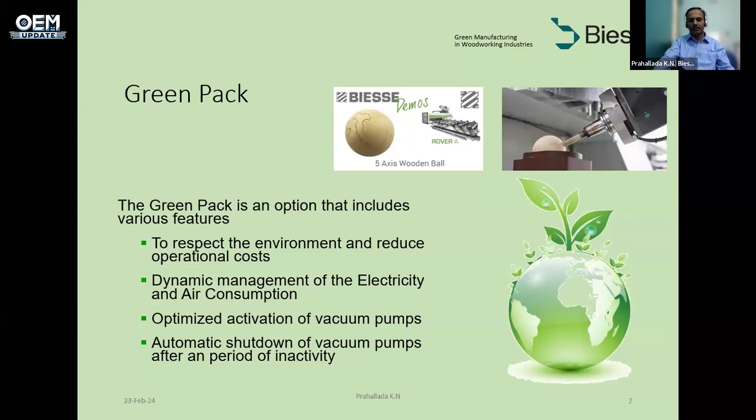So we need a plan for optimization of activation of vacuum pumps. We have vacuum zoning, and for that we have automatic shutdown of vacuum pumps after a period of inactivity. All these things are incorporated in the package, and it's a good sign that many customers are going with this package.

Also, in manufacturing aspects where we can target certain things, we had a project of coming up with green PVC vacuum modules - the suction cups we use on our pod and rail machines. We have some configurations using 16 pods, some using 24, and some using 32 of these parts on the machine.

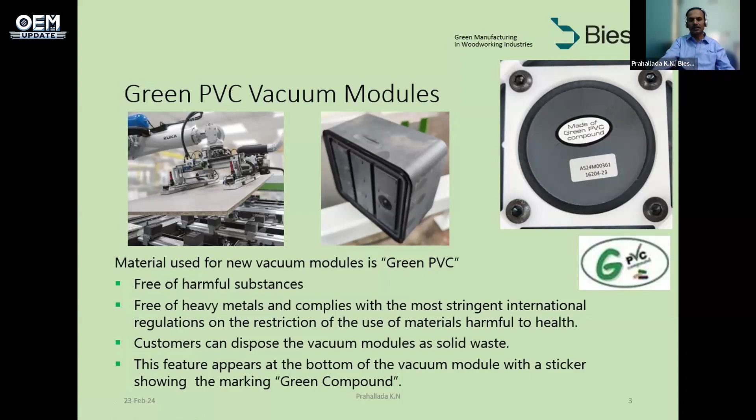So we started using material called green PVC, which is free of harmful substances, free of heavy metals, and complies with most stringent international regulations. The good thing is customers can dispose of the vacuum modules as solid waste. This is clearly mentioned on the bottom of the vacuum pod - you can see the green PVC compound marking, showing customers can dispose of this without any special treatment needed, unlike the previous modules made with phenolic.

Also on the technical aspect, we have started with another option - the torque C-axis, an interpolating C-axis on the electro spindle. On the left hand side, this was the traditional solution with a motor reduction gearbox and gears, which had many parts, an external motor, and a bigger flange to accommodate it.

One thing is on the machine dynamics part, because this comes on the Z-axis, so it has a definite bearing on the acceleration and machine dynamics. We worked on this and spent a substantial amount of our turnover on R&D projects like this - not only to enhance technical capabilities, but also on the sustainability aspect of reducing the footprint of developing technologies, especially the carbon footprint.

So now we have a compact torque C-axis, which is not only a technically superior solution than the existing one, but also very compact, with improved machine dynamics. It's actually 3 times faster and 6 times more accurate, and this serves better because it's something like the DDM motor you have today in advanced washing machines from Samsung, LG, Bosch, and similar brands.

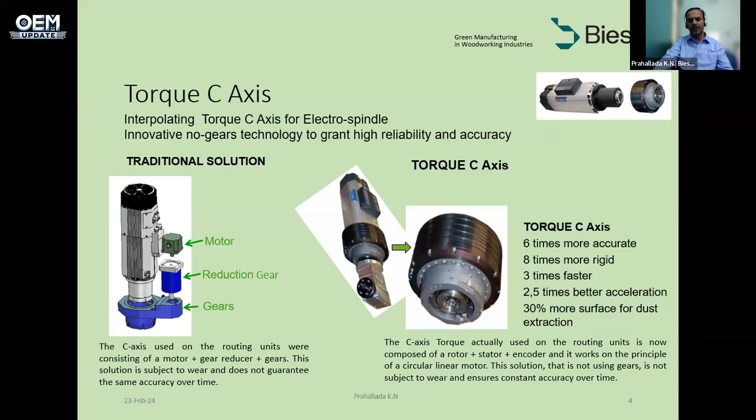That is the takeaway which we need to consider going by the green manufacturing technologies. So when it comes to this, like little drops of water make a mighty ocean, even we go to that minutest details, where earlier we used to have plastic inserts and sleeves to identify cables, and we use a lot of cables in the machines and systems we manufacture.

So we have incorporated an automatic cable length measurement, cable stripping, and another important aspect on the cable itself. Now we have a direct printing mechanism with a thermo inkjet printer that prints directly on the cable. It is not only on the electrical cables, but also printed on the tubes we use in our pneumatic modules. With this, we have eliminated most of the plastic sleeves that were there.

You can see on the left hand side here, the old system where we had the identifiers, which were small plastic modules. We have totally eliminated this across all the machine formats we are doing. With this, we have substantially reduced the part count as well as the plastic that finally goes as waste, which we have avoided by adopting this practice.

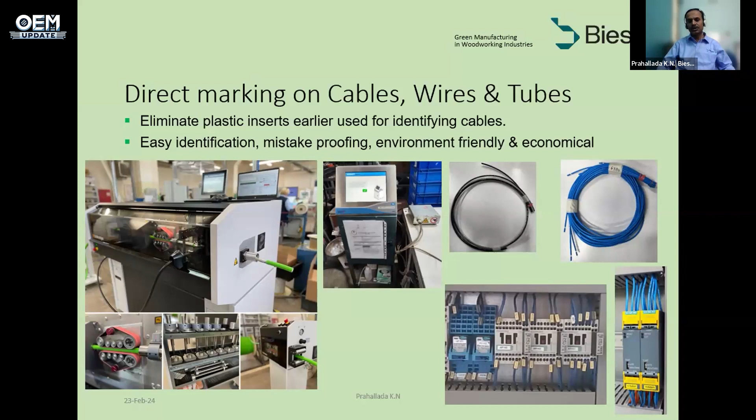So the next one is a very important innovation that happened recently on our edge banding machines. This is actually a hydrogen force system, an innovative solution for perfect zero glue line edge bonding. And it is something we can boast of today: with 1 liter of water, 1.5 kilometers of edge band panels is possible today.

And this actually ends up with almost a 70% reduction in energy consumption. That's a whopping amount when compared with the previous technologies we had, and also with the technologies our competitors have. And also it guarantees unmatched quality on finished products, and great edge bonding strength, which is very much essential in high-end furniture.

And of course, energy consumption is reduced and maintenance costs are minimized. This system is more environment friendly because it doesn't use any glue, but a minimum amount of glue with a special edge banding tape. It will be there on the tape itself.

So this system actually uses the hydrolysis process to generate hydrogen, which is used as a sustainable energy. In fact, hydrogen is ignited at that particular point where the energy is required to do the banding process. And it is definitely lower in maintenance cost compared with other technologies, particularly the laser technology. This is actually a breakthrough innovation done recently by Biesse Group.

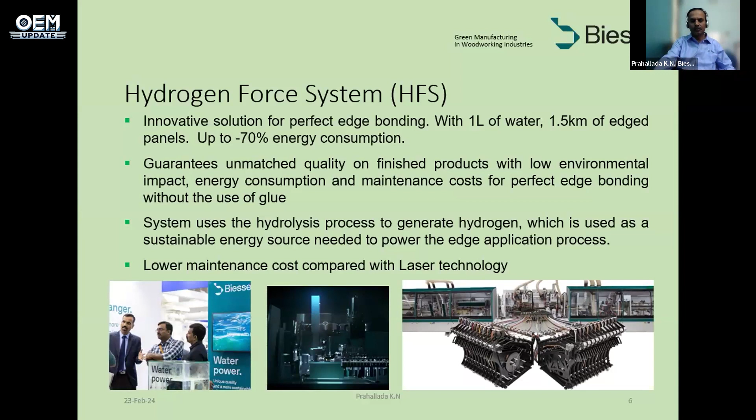Also when it comes to assembly manufacturing systems, here in our Bangalore plant as well as in our plants in Italy, we have lean manufacturing systems incorporated, where machines having more footprint are assembled and tested at customer site, while only the basement unit comprising the cutting line is tested in the factory. Modular unit assemblies aid in installation and testing on site within a day.

So we have this breakup of modules, and also a thorough process where it can be integrated at the customer site within 24 hours. And assembly on rails, which is real-time monitored as with the takt time requirements that are there. And for all the machining lines, it is established. You can see clearly for our edge banding line here, as well as for the CNC line.

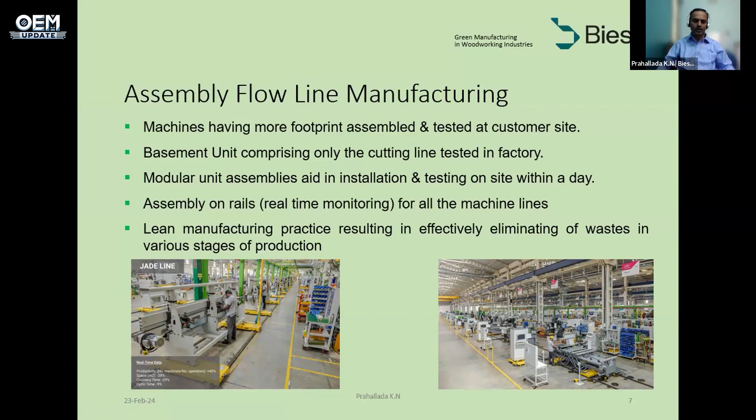And lean manufacturing practices result in effective elimination of waste, all the 7 ways, 8 ways that we have in the lean system, through various stages of production.

And of course, the key differentiator in the business today is the software. Here, there is substantial improvement in optimization and utilization targeted towards the material our customers use, especially with the nesting technologies and the OptiPlanning software we have for our sizing systems, and proprietary software for optimizing cutting patterns, tool path, and real-time simulation for complex machining requirements.

So it is actually happening. Simulation can be done in real time, and all of these are part of our 3D CAD/CAM system, which is proprietary software developed by Biesse.

An efficient and intelligent material handling system complementing diverse production needs of customers, from basic automation to very high-end automation. Even for batch-one processing all the way to mass production, we have solutions, and we have mastered having systems across the world, across all formats of industries.

An award-winning software was developed on an IoT-based platform called Sophia, for services optimization, predictive maintenance, spare parts management, and analytics. In collaboration with Accenture we developed this, and it was awarded during Ligna.

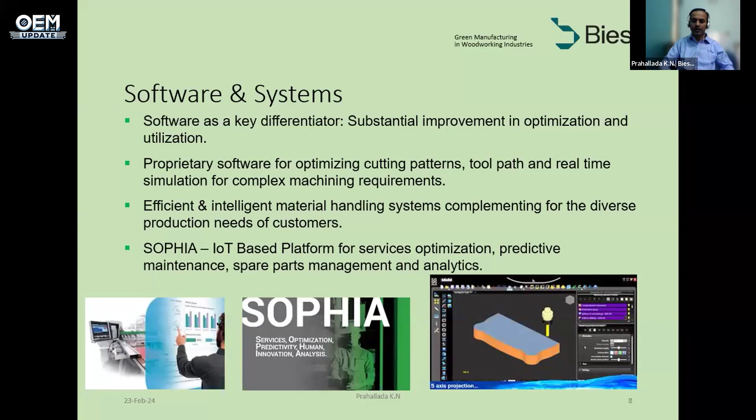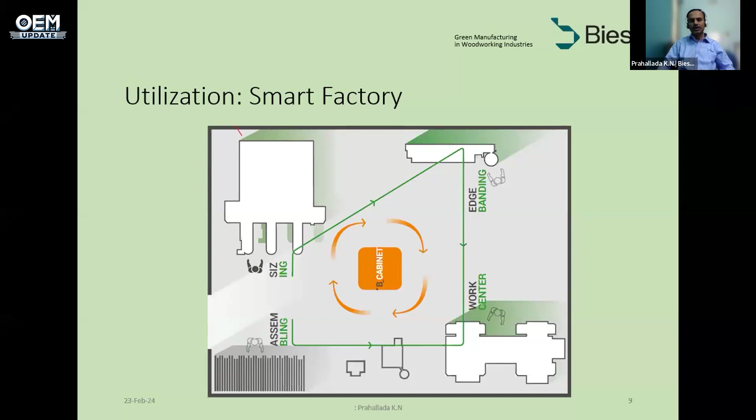We have this integration even for small-scale manufacturing requirements, with a master software that controls operational sequences through various machine centers like sizing, edge banding, and machining work centers. The master software drives optimization and planning, the CADs, and the process flow. This is a design-cum-machining software integrated as a package mainly targeted towards process automation.

This layout shows that within a space of around 1,200 square meters, we can have a modern digital factory for companies requiring high return on investment. It's for customized production requiring a minimum number of operators, and of course scalability is there too, with the concept of plug and play so customers can integrate when and where required for their production and productivity needs.

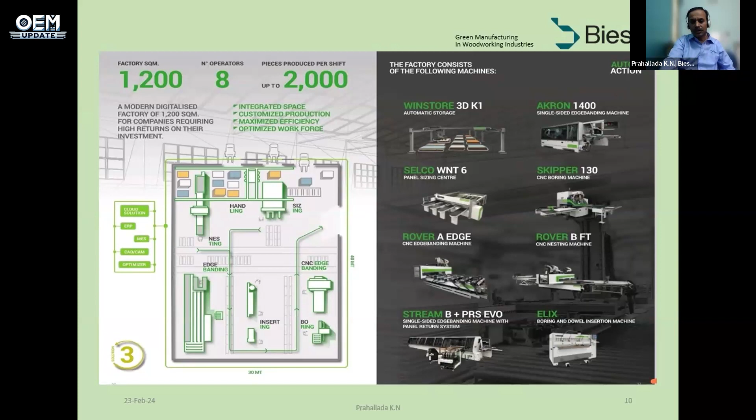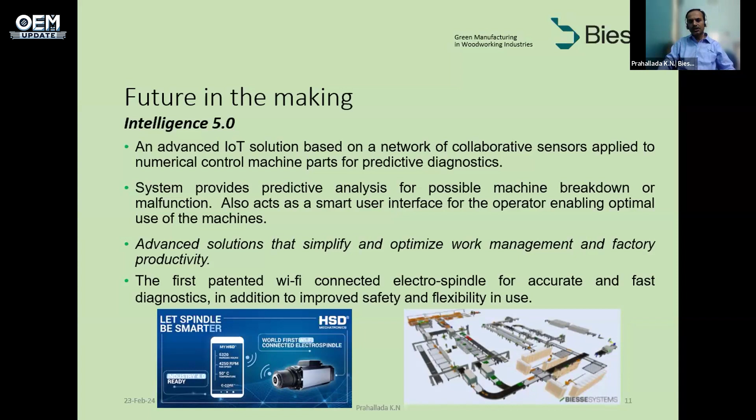One of the group companies, HSD, has come up with a Wi-Fi connected electrospindle for accurate diagnostics, in addition to improved safety and flexibility in use, which helps in green manufacturing solutions because of predictive possibilities that will not result in downtimes, and also aids in customer planning for spares.

There is really a collaborative solution the whole industry is looking at, despite the competitive market landscape. Seven world leaders in the woodworking machinery industry, spearheaded by Biesse, have worked together as a team defining a standardized interface to connect all woodworking machines—machine to machine from supplier A, supplier B, supplier C—and any system that needs to be integrated.

Earlier it used to take almost 3 to 4 days to integrate different technologies, interfaces, and platforms. But now the ecosystem, with these 7 world leaders in woodworking technologies, has come up with an open communication standard for the smart woodworking factory. It takes just 3 hours with plug and play solutions to seamlessly integrate these diverse technologies—just 3 days were needed earlier to interconnect the machines, but now it's just 3 hours.

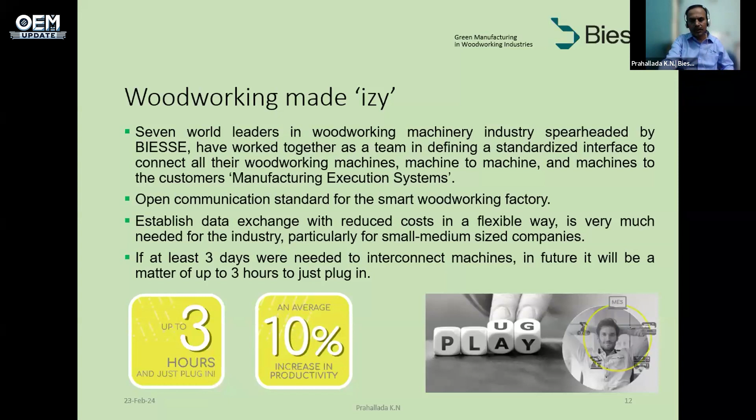This is a grand vision from the industry as such. The big machine makers from the woodworking industry have come up with this initiative to save not only customer time but also various resources. It's also targeted towards the most important factor when modernizing on IoT, AI and ML platforms—cybersecurity, which adds to the cost and finally to the efficiencies.

I conclude my presentation on the advances in woodworking technologies with perspectives on green manufacturing methods and practices we have implemented. Coincidentally, India Wood is happening right now in Bangalore, and those people who are in Bangalore, I invite them to visit India Wood to have a first-hand experience of the technologies. So wood is good.